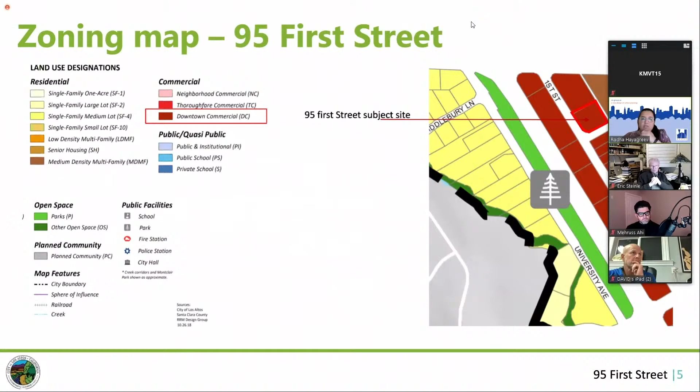The Los Altos zoning map shows the subject site is zoned downtown commercial. The current proposal we are reviewing in the pre-application stage is proposing a 4-story tall, approximately 68,000 square foot commercial and residential mixed use proposal.

The proposal shows the building to be 62 feet 2 inches tall. The first, second, and third floors are shown to be commercial use, and the 4th floor is presented with 10 residential units: 9 are 1-bedroom units and 1 is a studio unit, and 2 units have been set aside and dedicated to below market rate units.

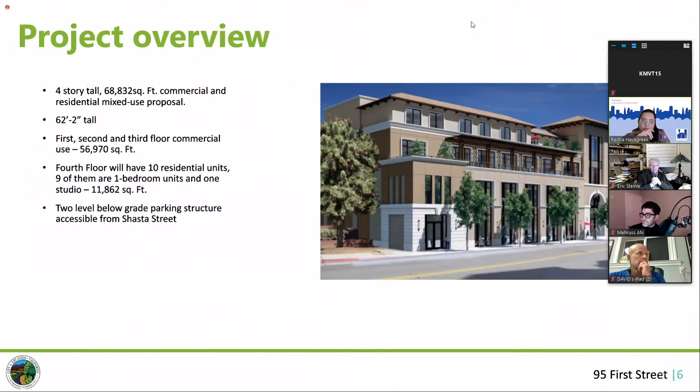There is a portion of this proposal that's below grade, with two levels below grade dedicated for parking. I will be handing over this mic to the applicant for them to share more details and more nuanced details of the presentation at this point.

I believe it would be Lisa Ring who will be presenting. Lisa, let me know if you can share your screen. Is it Mike or Lisa? Yeah, hi Radha, it's Mike Field. Hi Mike, okay sorry, I didn't know it was you. Oh no problem, Lisa's a lot more fun to listen to than me, trust me. But okay, perfect, we've got the presentation up here.

Okay, so it's good to be with you tonight, members of the commission. Excited to be talking about this project.

Just a little bit of background on us. I have either worked in or lived walking distance to downtown Los Altos for over 20 years of my life. For those who might remember, I worked at How Sweet It Is, the candy store, a long time ago, and would spend a lot of my high school lunches at Los Altos High School in downtown. Once I was married and started having children, we lived on Palm Avenue, and would walk down to the farmers markets, and my kids' favorite places, Area 151 and Bumble, and of course Posh Bagel. So I love downtown Los Altos. I've spent a lot of time there. My brother is a business owner in downtown, and so I have a lot of affinity for the community.

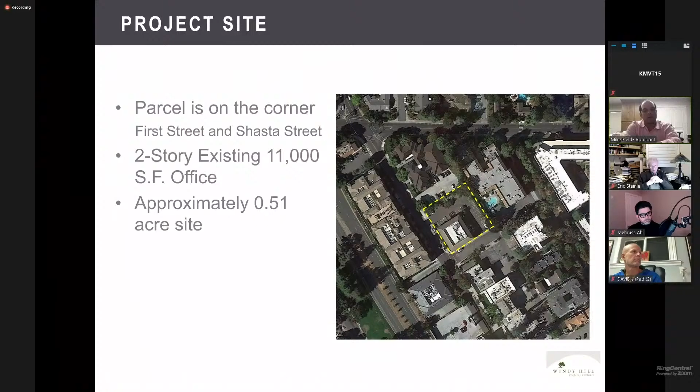The existing 2-story office building is about 11,000 square feet with all surface parking.

We talked about the height, 4 stories in height. You'll notice on First Street the 3rd story is set back with an outdoor balcony, and the 4th story is set back even further with outdoor balconies. That's trying to create this pedestrian scale. You'll notice the plants and trees in the renderings when we get there, and we're trying to create an attractive pedestrian environment where when you walk by this building during the day or at night, the recessed windows, the landscape, and the exterior lighting all make it for a pleasant experience.

There are two distinct entry points on the building, one for the commercial, which is elevator served, and one for the residential, which is also elevator served. You'll see that when we get down to the renderings, and we'll walk through that a little bit more.

20% affordable housing on the 4th floor. In addition, the building will be LEED Silver best practice, which will include bicycle parking, lockers, and showers. All the mechanical, electrical, and plumbing systems will be state of the art, essentially, to consume a minimal amount of utilities. These newer structures with the high performance glass, roof systems, etc., are incredibly environmentally efficient.

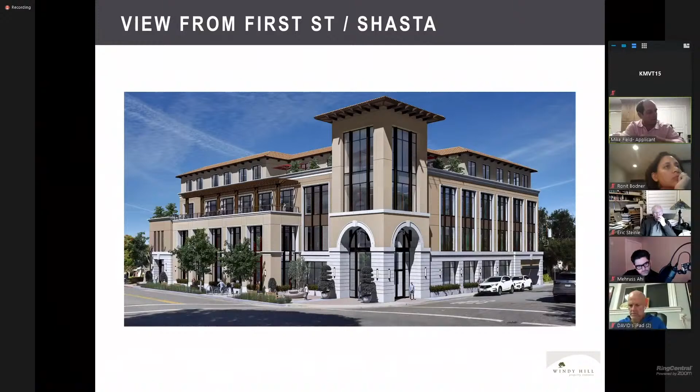Let's go to the next rendering. There we go — this is a zoom in of the corner. It gives you an idea of the pedestrian environment and what that little courtyard is providing on the corner as you walk past the property. You'll also notice that by creating that 2-story element on First Street, it makes the building much less imposing as a pedestrian walks by on both sides of the street.

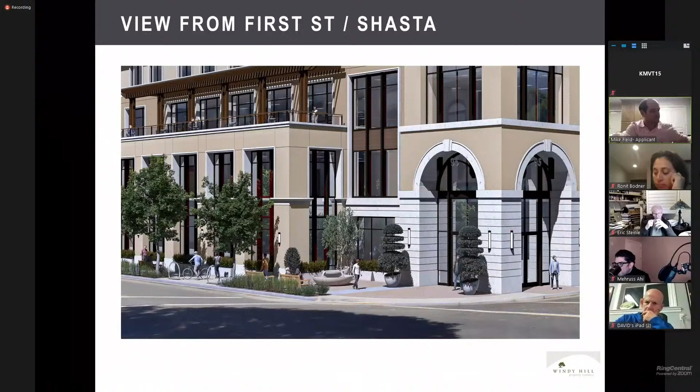If you go to the next slide, you'll see the apartment entrance there, on the left-hand side. This is where apartment users will enter and exit the building, and they have their own private elevator that'll take them to their units.

One thing I would mention is there's a tremendous desire in Los Altos to have high quality retail, and to support that retail so that independent business owners who come into the community can get enough foot traffic to sustain a retail business. What we've found in other downtowns is that high quality office space brings folks there for lunchtime and during the day, when sometimes downtowns don't have as much activity. I know Los Altos Grill, for example, is open for dinner, and as these office users create more demand during lunchtime, it helps support retail and encourages businesses to function not just during dinner, but also lunch and breakfast.

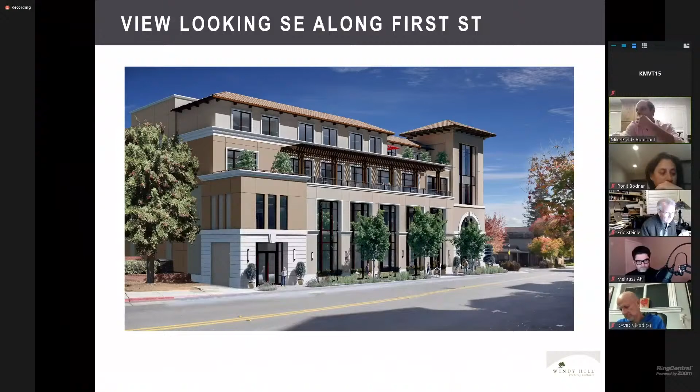One of the huge needs in Los Altos for office space has been created because most office space downtown is over 50 years old, and a lot of the new office space built in the last 20 years is owner occupied, like the Packard Foundation and other buildings like that. So if someone lives in Los Altos and wants to work downtown, and they have a company that needs to recruit talent, they need a high quality office environment. That's really what this building is designed to provide, with incredibly high quality of finish. If you look at the more modern building at the corner of San Antonio and First Street, that's the kind of quality we're seeking to build here. Although it's not a modern structure we're seeking to build, it's more akin to what's around us—a similar quality of construction.

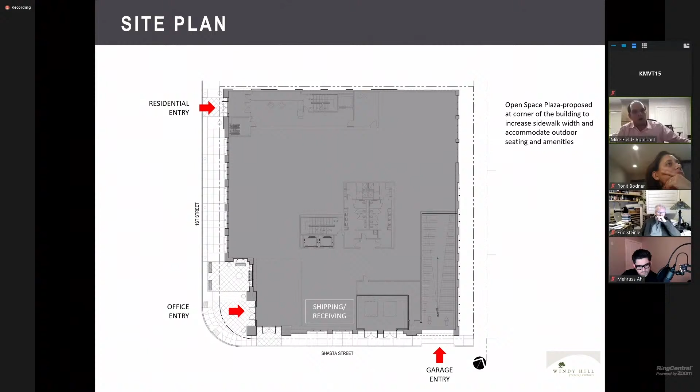So just going through the floor plans, I think this slide is repetitive, but it shows you an aerial view of the courtyard and where the entrances are, where the ship receive area is. Again, one of the huge benefits of Shasta Street for this project is that all of our backdoor stuff—ship receive, garage entry—it's all off Shasta.

So we won't be impacting traffic flow along First Street from that perspective. The next floor plan shows you not much—it shows the core and the outdoor patio and how the building's set back. The next floor plan shows the residential layout, and you'll notice the central interior courtyard that's open air, a great amenity for residents. We could have done more units here by going to all studios, but looking at the Los Altos market, the supply of 1-bedrooms downtown is essentially non-existent for rental product, so we thought that was the way to go—but we're open to the commission's thoughts on the unit mix.

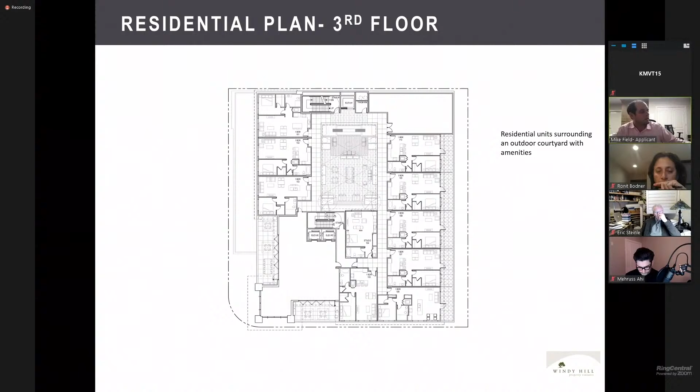And so that's all I have for you tonight. I certainly appreciate your time, and we look forward to your initial first read and feedback on the project, and are here to answer any of your questions. Our whole team's on the call, so no matter what your questions regard, we should be able to address it.